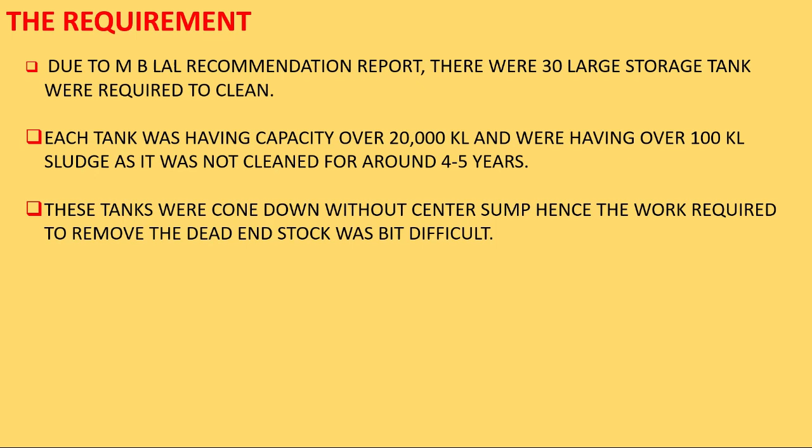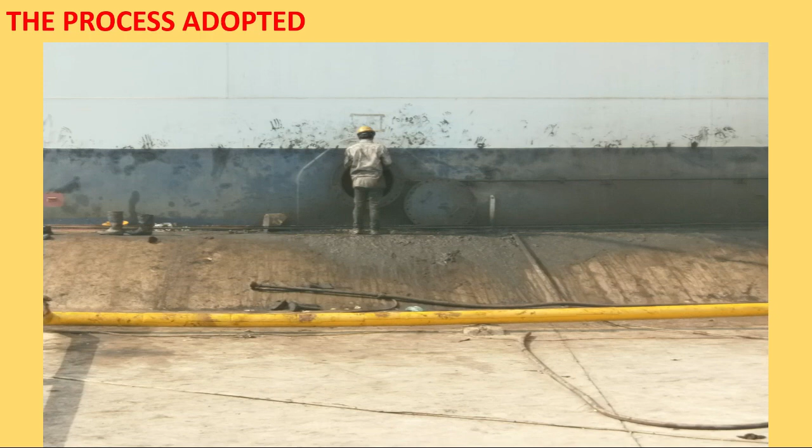So first let us see the process adopted by the cleaning contractor to whom the contract was given. They used to remove the finished product and open the manhole cover, and after that manually remove the sludge. After removal, they were putting it into a vehicle covered with a polythene sheet, and this vehicle would shift the sludge to a sludge yard.

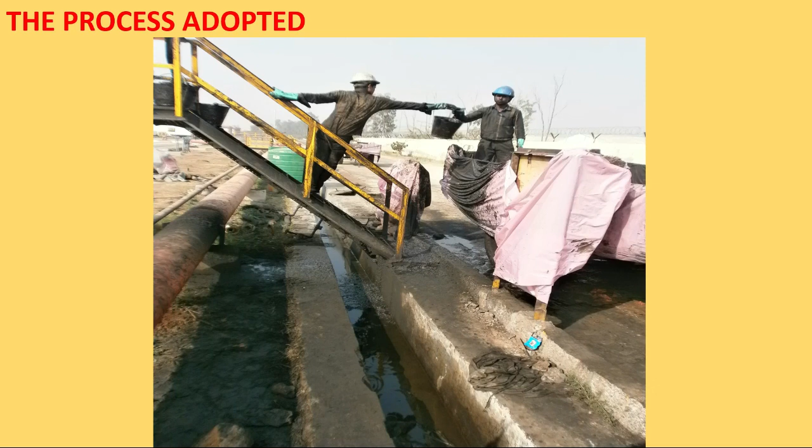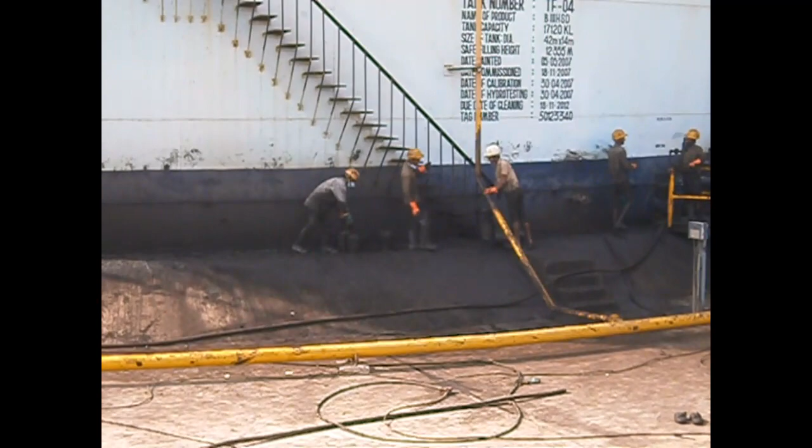I'll show you a video of how this process is done using a human chain. Here you can see the sludge being passed outside in a bucket, which a person carries on the apron of the tank and hands to another person who collects the empty bucket in return.

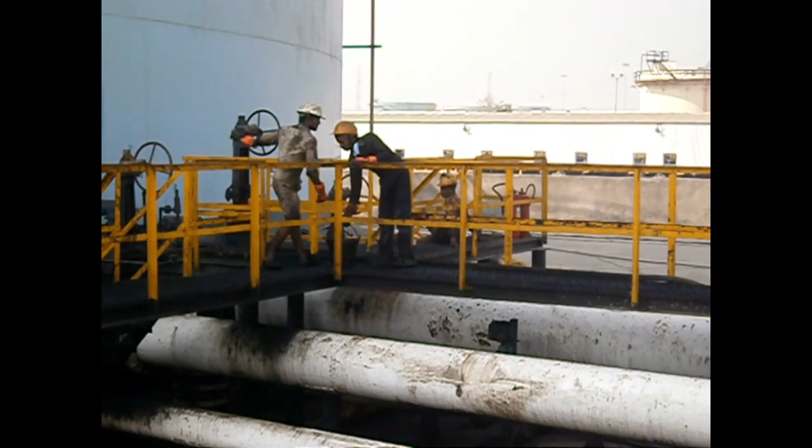This bucket is passed to another person, so each person has a limited travel distance, passing the filled bucket outside and collecting the empty bucket. Here you can see they use a walkover bridge, and in many places, whenever they shift the bucket from one place to another, the sludge falls down on the area.

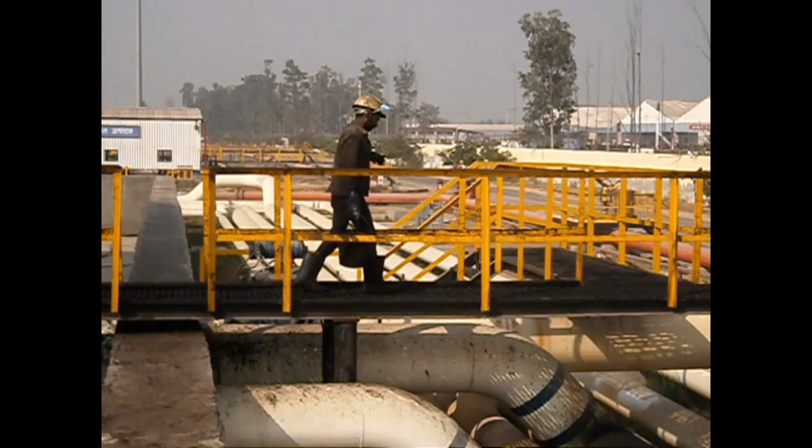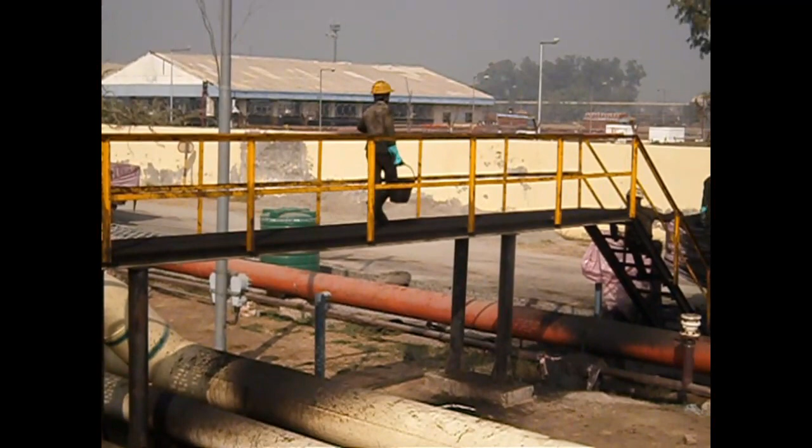This is how the sludge removal process was done, which was very time consuming - in a day only 5 to 7 KL of sludge was transferred from the tank to the vehicle or sludge yard, and everywhere the sludge was falling on the ground.

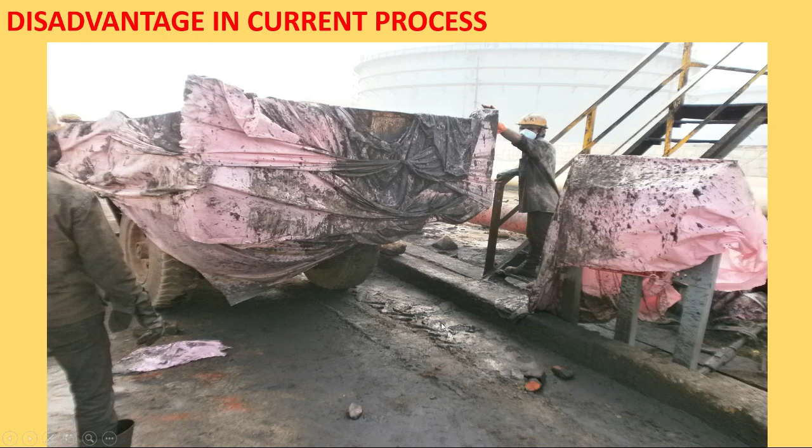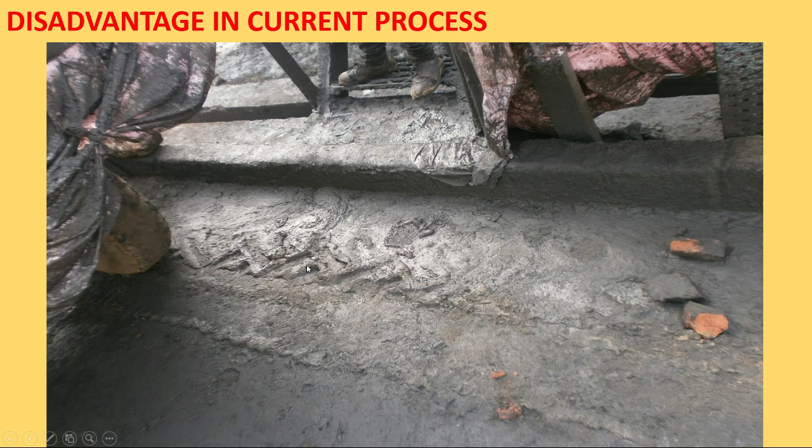Now let us see the disadvantages in this process. Here you can see a lot of sludge has fallen on the ground, making the entire terminal very dirty. Here's a close view - this kind of sludge fallen on the pipeline rack or walkover platform is not very easy to clean even with pressurized water.

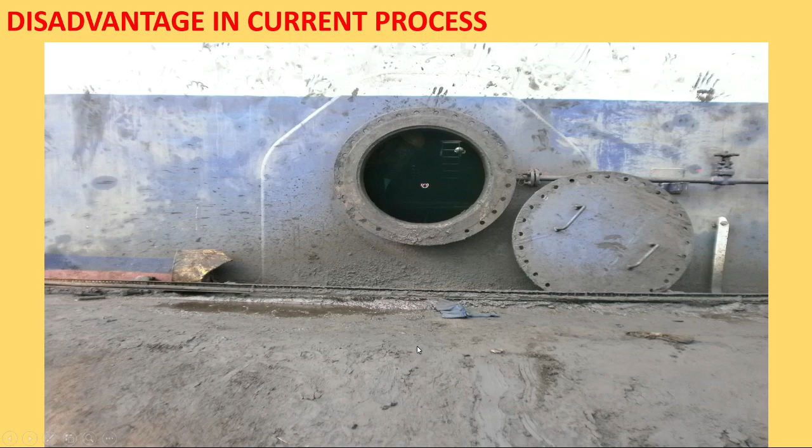So that dirtiness will always be there and make the floor slippery. Here is the tank apron where a lot of sludge has fallen and filled up all the porous holes, defeating the very purpose of the tank apron.

When the workers finished their job, they used to open the nearby hydrant point and use water from it to clean themselves, which was activating our fire engine. With this process, it was really difficult to control the workers at closing time, and the entire terminal was getting dirty.

So we thought about what should be done, and there's a classical English proverb - necessity is the mother of all invention. So we started inventing ways to solve this.

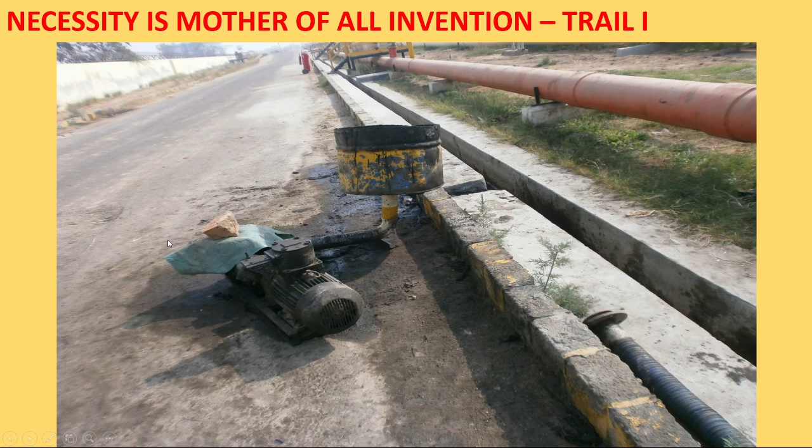We used a rotary vane pump wherein we made a hopper with a wire mesh filter. We thought we'd put the sludge inside the dike, and the rotary vane pump would pull out the sludge and we'd collect it into the vehicle.

But what happened was that when we used this pump, the rotary vane pump used to get stuck up after only 200 or 300 liters of sludge suction.

We tried to use the screw pump, which is another kind of positive displacement pump, but somehow it did not work.

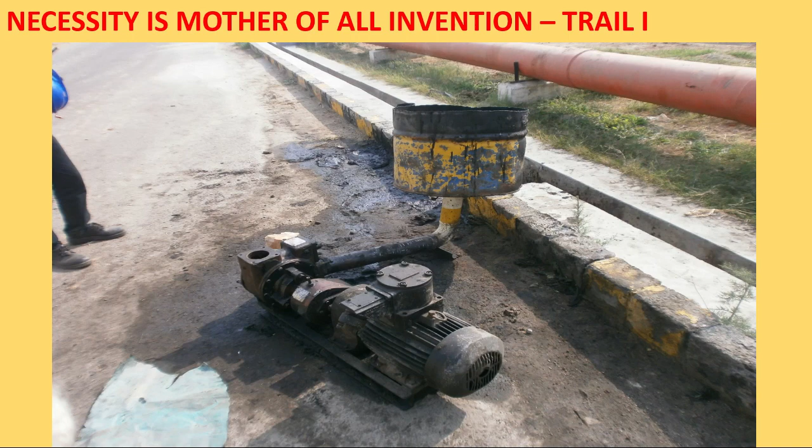Then an alternative method we tried: why not have a cable rope wherein we'll hold up a big trolley, and from the manhole put the sludge into this trolley, and using this cable rope directly put the sludge into the vehicle.

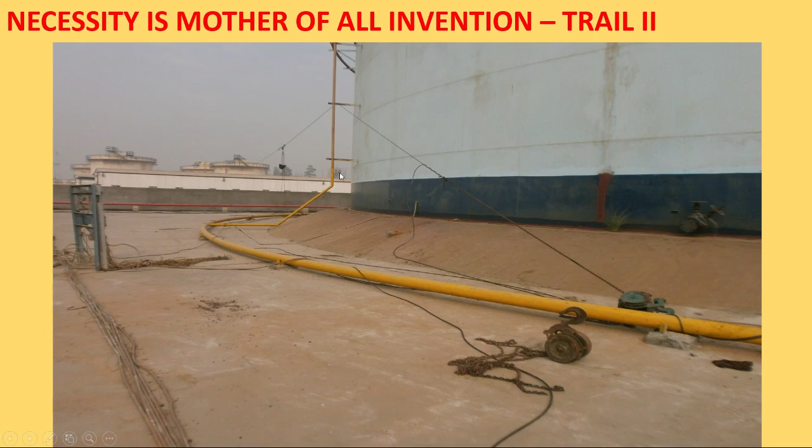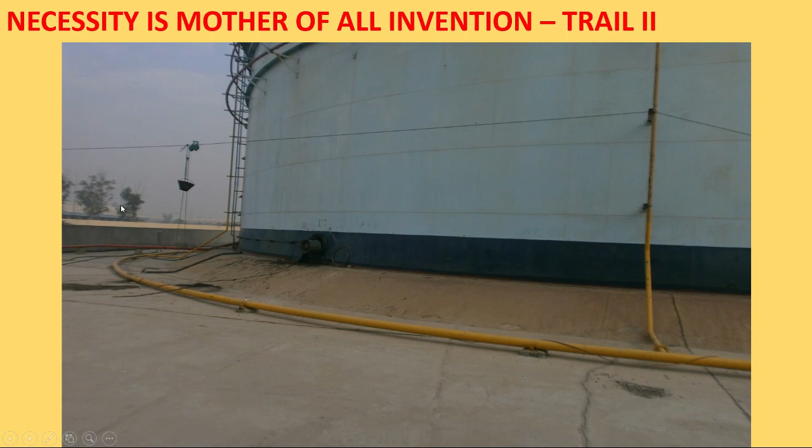So we tied it up this way. We made an arrangement and a big trolley was made. From here the sludge was supposed to be put into the trolley. But with the sloping of the trolley, one side we gave a slope so it was easy to slide, but pulling the trolley on the other side was a bit difficult and time consuming. So this method also did not work for us.

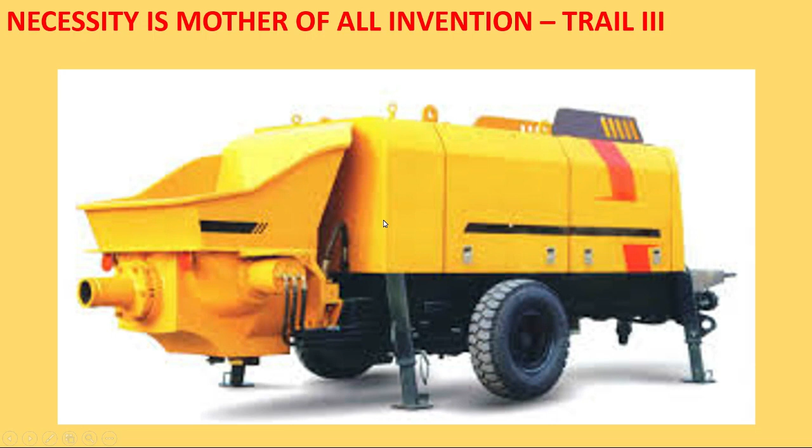Then we thought, let's have the concrete pump, which is used to push concrete. This is the hopper where they put the concrete, and below that there is a concrete pump, and from this point the concrete is pushed to the other end.

But the problem with this concrete pump was that it had very low suction and high discharge. So it was very difficult for us to shift this concrete pump, which weighed approximately 1500 kilograms, inside the dike and then take it out again. So this also did not work for us.

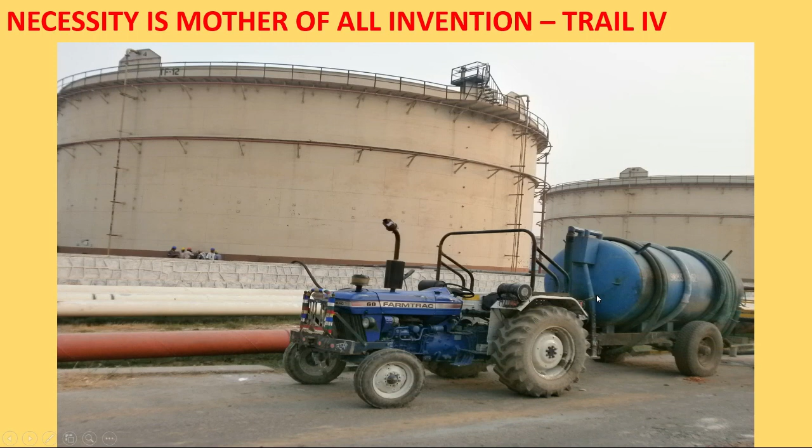During that time, our resident coordinator, Mr. B.D. Shrivas, gave an idea and suggested that the Municipal Corporation of Delhi uses a high suction vehicle, so why shouldn't we try that.

Immediately we lined up everything and called for this gully sucker, which is normally used for the purpose of cleaning septic tanks. Basically, this gully sucker has a vacuum pump attached to the PTO of the vehicle or tractor, and this vacuum pump creates a kind of vacuum in an airtight container.

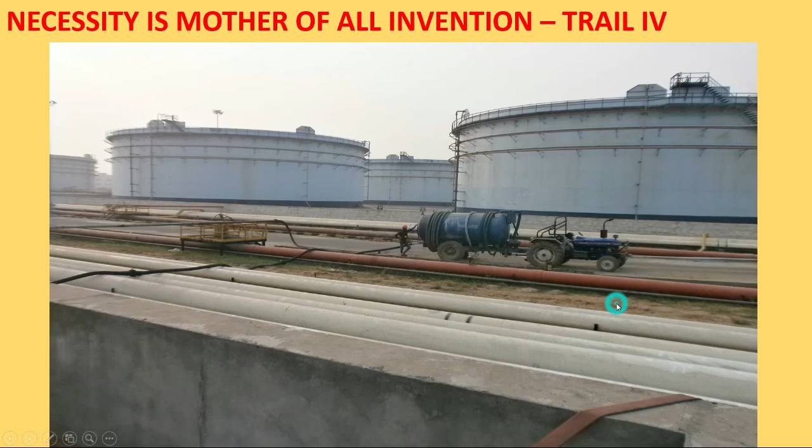At the back side of this airtight container there is a suction point provided. So when vacuum is created, it sucks in everything connected to this point, and this suction is very good - it can suck from a long distance also.

Here you can see we have connected a vacuum pump, a gully sucker. Through this point we have laid out the hose and put it directly into the manhole. That way, from that manhole, which was around 30 or 40 meters away from the main road, the gully sucker was able to suck the product sludge from the storage tank, and we would move this gully sucker and empty it out in our sludge area.

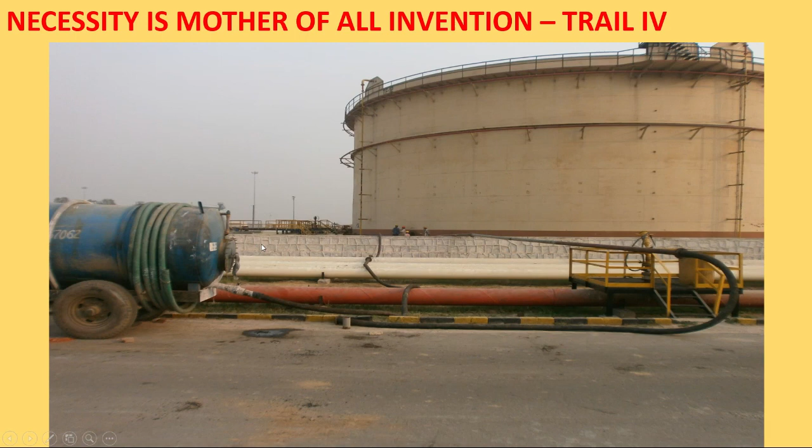Here you can see the very neat and clean way we used this gully sucker. Nothing else was required - only one person was inside the tank, moving the pipe here and there to suck the sludge effectively into the gully sucker.

Here we have used two pipes - this is the first pipe and this is the second pipe. So to speed up the process, we are using two gully suckers, so we can clean up the tank effectively in less time, in the cleanest and safest manner.

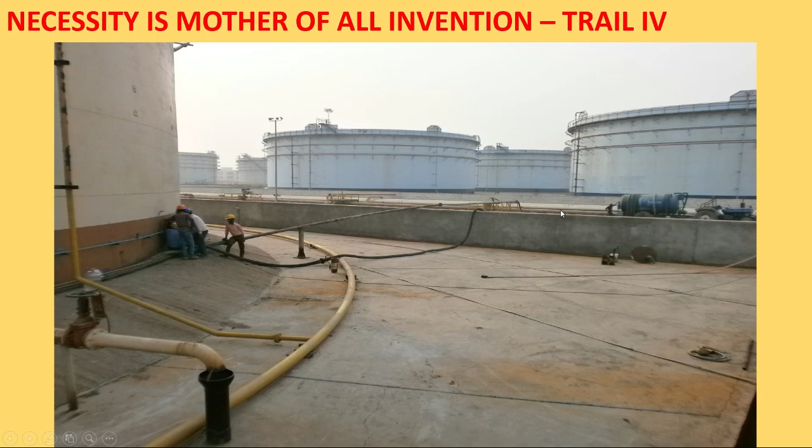Here you can see the dike is very clean, nothing is getting dirty, only a little spot is found on the road. So that is how we used the gully sucker and this innovative method to clean up the tank.

Now the question is, from where can you find the gully sucker? I'll say there are many private operators who have gully suckers and are involved in cleaning septic tanks. These gully suckers you can also rent or hire from the local municipality.

But one thing you should make sure of - if you are using this gully sucker for the purpose of sucking the finished product, you should wash it thoroughly before using this vehicle.

So guys, that is how we made various trials for the purpose of tank cleaning in the cleanest and safest way, and also the time required for cleaning the tank was quite low. I hope you people also adopt such technology at your terminal or retail outlet for cleaning your storage tanks.